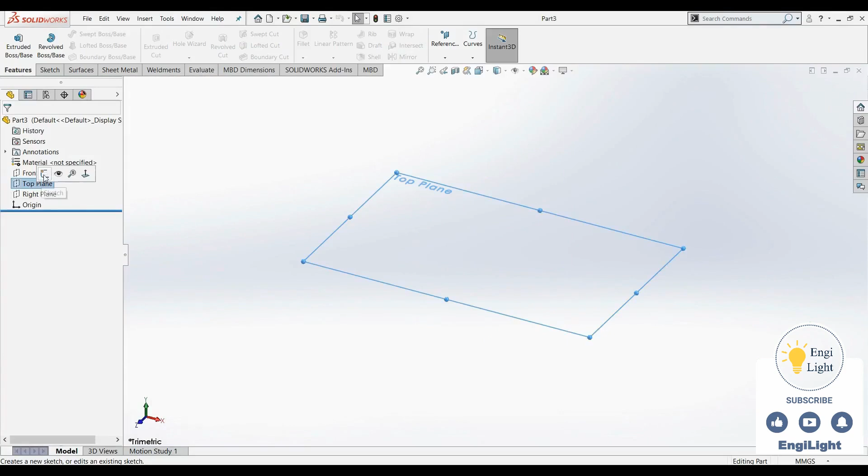So I enter the part module. On the top plane, I draw a circle with a diameter of 20 millimeters. And using the first rectangle type, corner rectangle, I draw a rectangle measuring 40 millimeters by 70 millimeters.

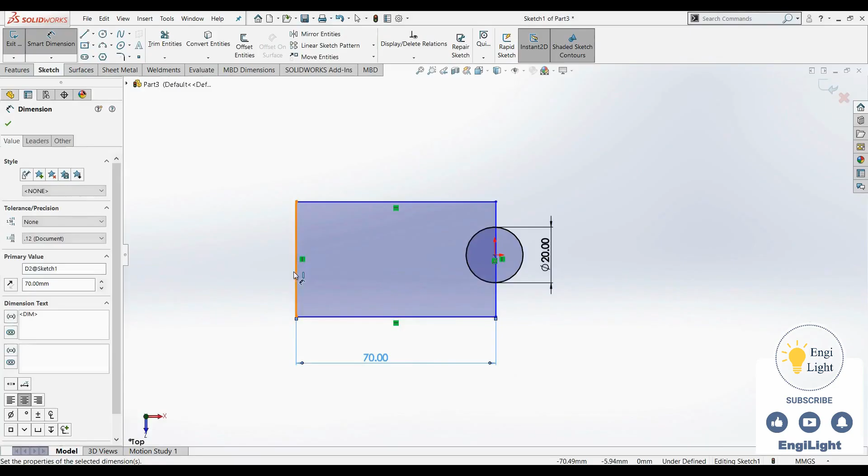This circle is located at a distance of 50 millimeters. And I place the center point of this line segment horizontally with my origin. Okay, I extrude the sketch by 20 millimeters.

Without exiting the sketch right here, I go to the Features tab and select the Extruded Boss command. SolidWorks automatically detects which areas to extrude. So in this section, I extrude my shape by 20 millimeters using the blind condition.

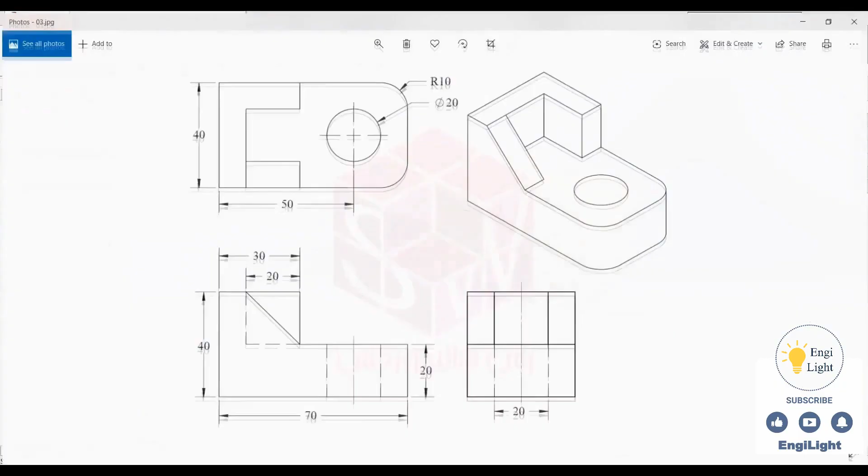Now, to draw this part of the shape, I look from the top again and draw the sketch on this face to create the shape I see from above. A size of 30 millimeters and a thickness of 10 millimeters. I enter a sketch on this face, go normal to the face, and draw the sketch using the line command.

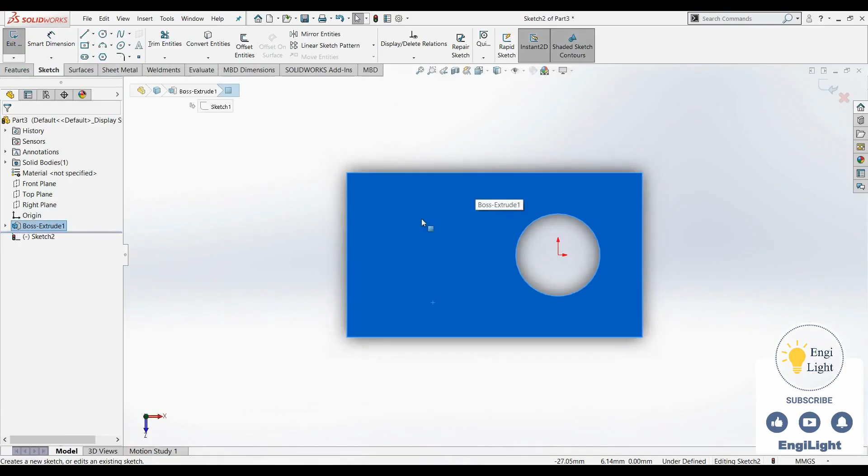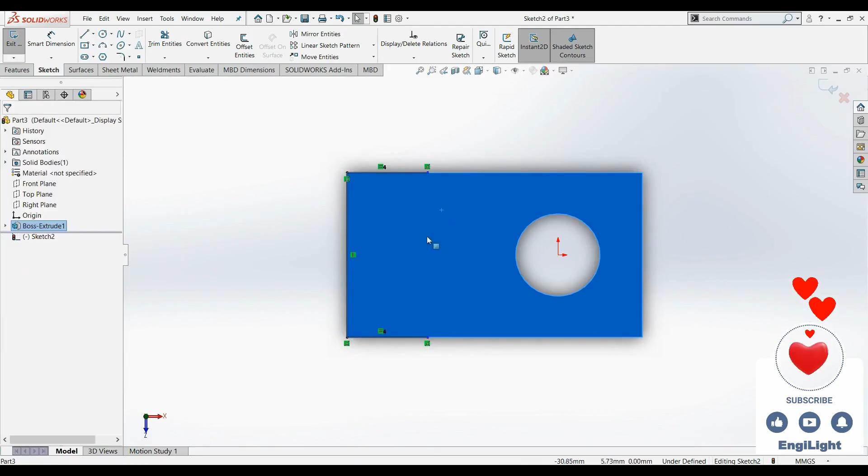I make these two equal to each other and apply a size of 30 millimeters. I set an offset distance of 10 millimeters for this section.

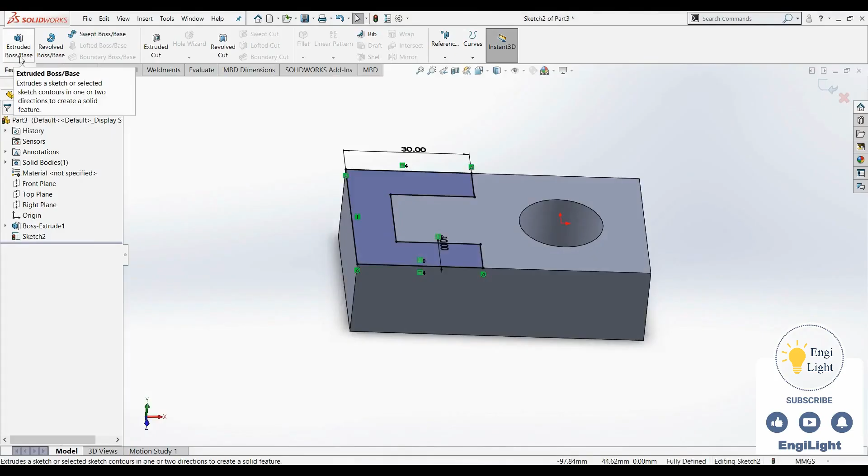I extrude the sketch I just drew on this face by 20 millimeters. So again, without exiting the sketch, I enter the Features tab and use the Extruded Boss command to add volume to the sketch by 20 millimeters.

Next, according to the reference drawing, to create this slope, I'll draw a sketch on this face, a triangular sketch. Then I'll use an extruded cut to remove material by 10 millimeters. So I enter a sketch on this face and draw a triangular sketch.

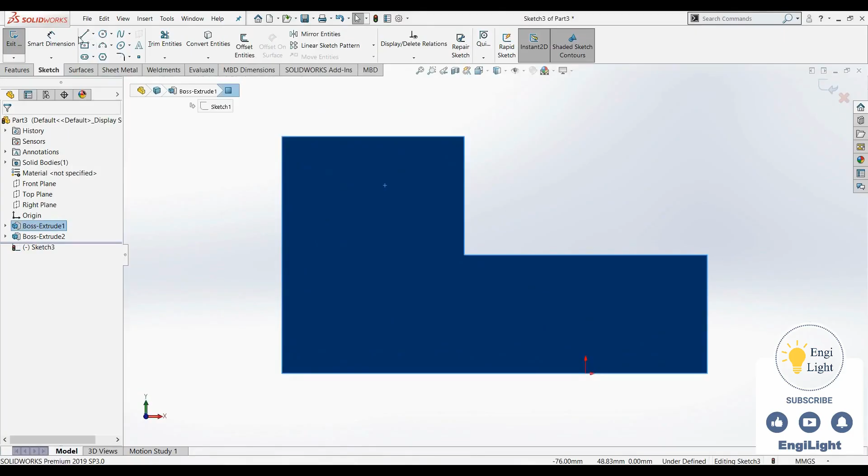From this area to this point, then this point, and up to this point, measuring 20 millimeters. Well, a dimension isn't needed here because these points have become coincident. We'll discuss this in more detail later. 20 millimeters, and another 20 millimeters.

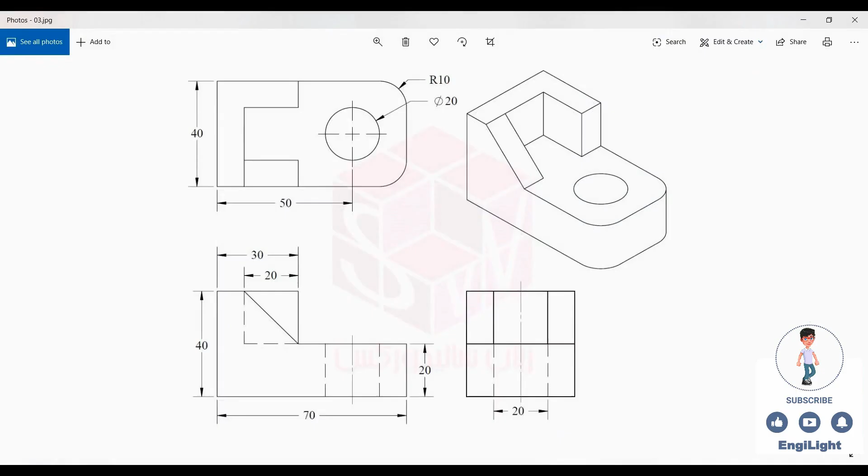And using the Extruded Cut command, I remove material from the shape by 10 millimeters based on the sketch drawn here.

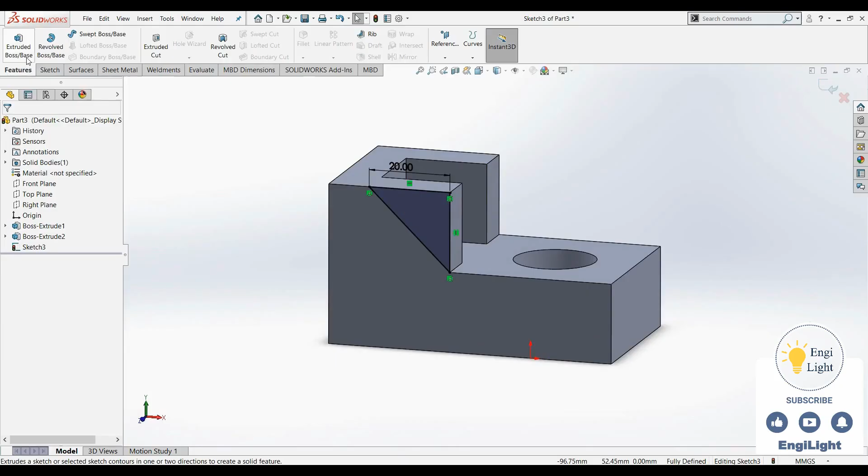Then, according to the reference drawing and the radius of 10 fillet, I apply a fillet to these corners. So from the Features tab, Fillet command, I define a fillet with a radius of 10 millimeters for this edge and this edge.

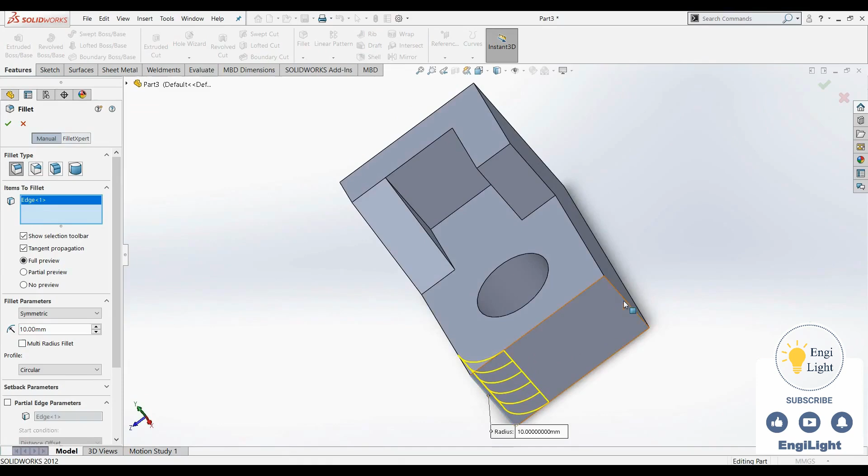This is how we design the shape. When we design a part in SolidWorks, very often the next stage is editing that part. In most cases, editing a part is actually more difficult than designing it from scratch. The more principled and careful we are during the initial design, the easier and less painful the editing process becomes later.

Let's examine an editing example within this part. Let's assume that after designing this part, we need to change the thickness of this part from 10 millimeters to 12 millimeters. What should we do?

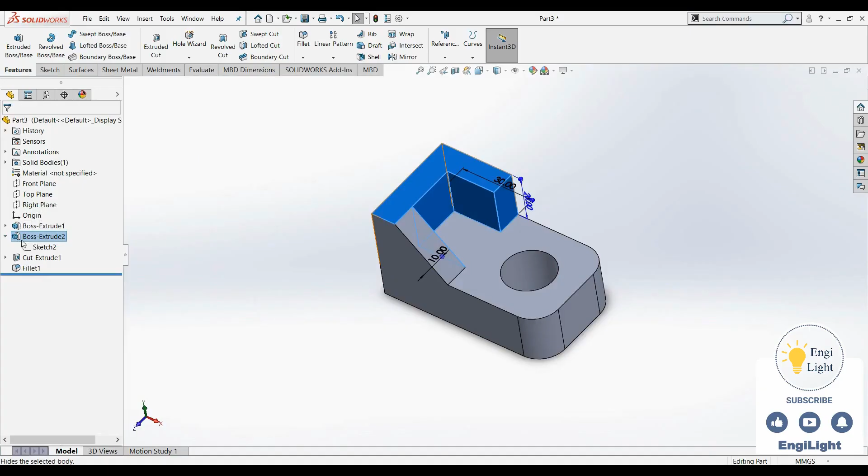We must go and find the feature that created this section, which is this feature. Since we want to edit the sketch, we can right-click on it and choose Edit Sketch, or from the pop-up here, select Edit Sketch. Or find the sketch in the Feature Manager tree and right-click to select Edit Sketch.

We enter Sketch Editing Mode, go Normal To, and change this value from 10 mm to 12 mm. As soon as I exit the sketch, the changes are applied.

However, this extruded cut, since I set it to cut 10 mm, is now causing a problem. Imagine if you were working on a complex part—small details like this could really cause issues.

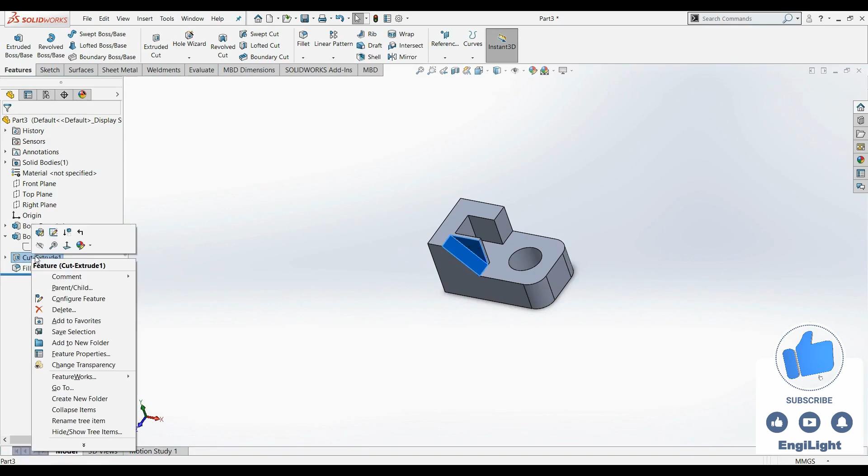To fix this problem, I find the feature where I made this cut, which is this extruded cut right here. I edit the feature, and this time, instead of cutting 10 mm, I set the direction one end condition to up to vertex. And in this box, I can specify that the cut goes up to a desired point, for example, up to this point here.

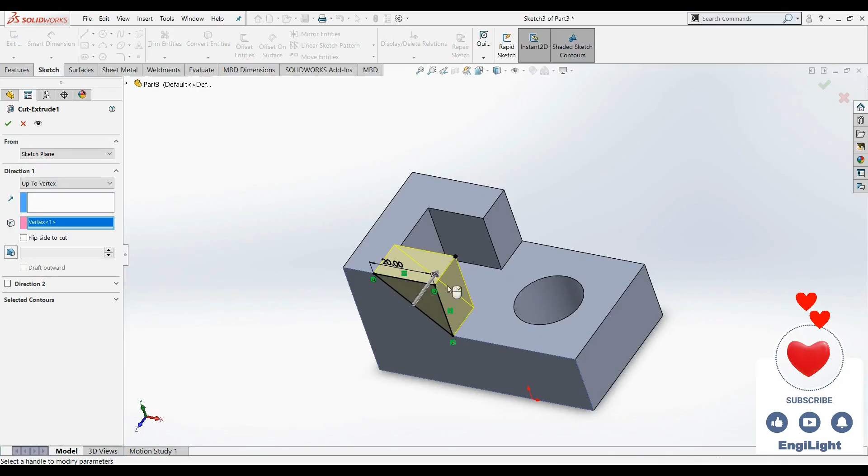Now, if I click OK and edit the sketch again, this time, no matter how much I change the thickness, for example, if I change it to 14 mm, it still cuts up to the corner point.

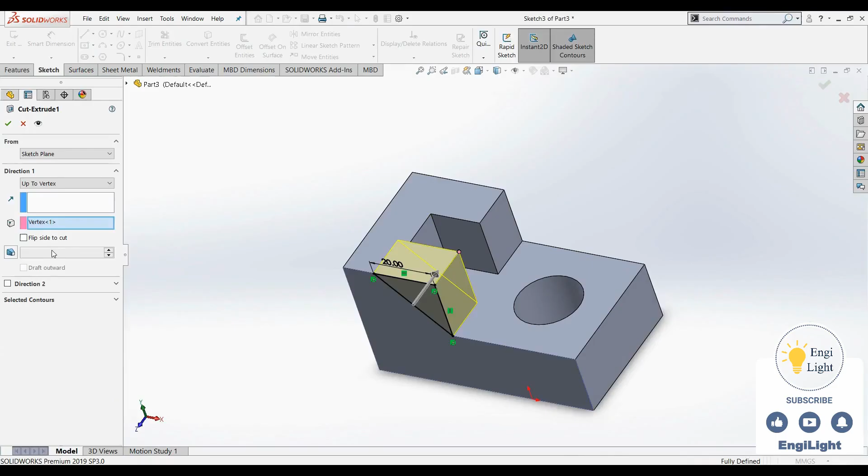Let's go back to the extruded cut feature and edit it again. So we select up to vertex here, and in this section, we define the point up to which the sketch will be cut.

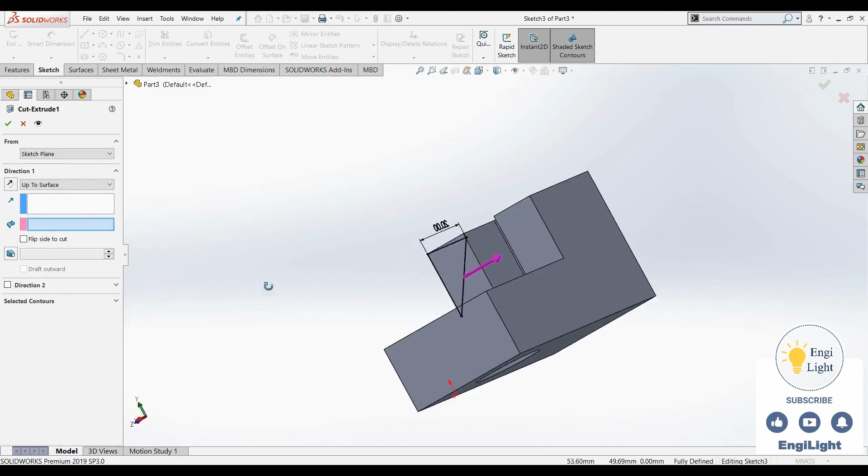From this same section, this time I select up to surface. A surface means a face of the model, either flat or curved, or even a reference plane, and I can specify it here—for example, cut up to this surface or this one, which gives the same result.

If I click OK, no matter how much I change the thickness, for example, even if I change it to 5 mm, it will still cut the shape up to the surface I specified.

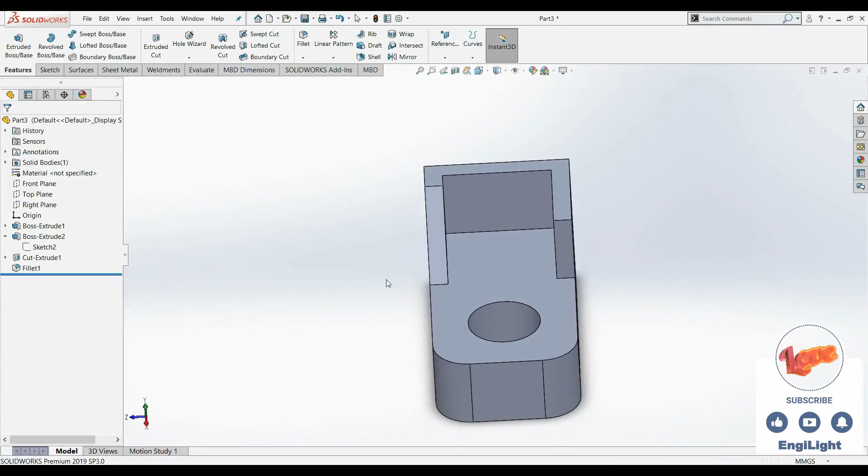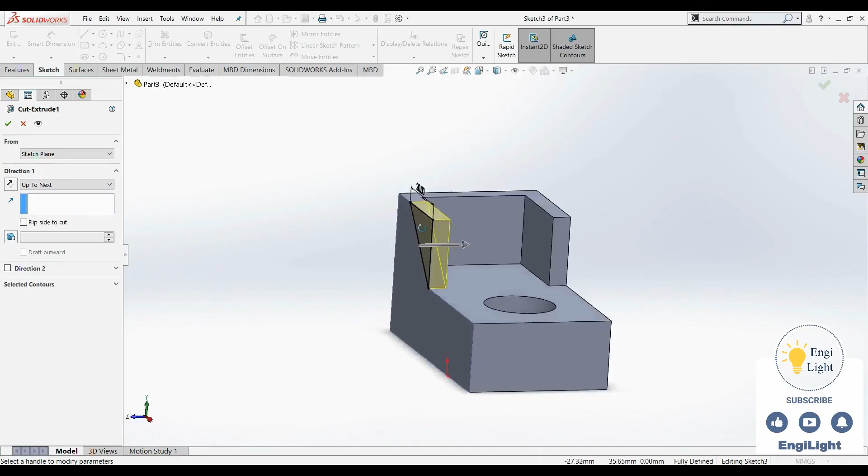Again, in this same section, we've covered up to vertex, up to surface, and up to next. Up to next cuts the model up to the first face or boundary it encounters in the direction of the cut. In this case, the cut stops at this face, because if the sketch continues, it would end here.

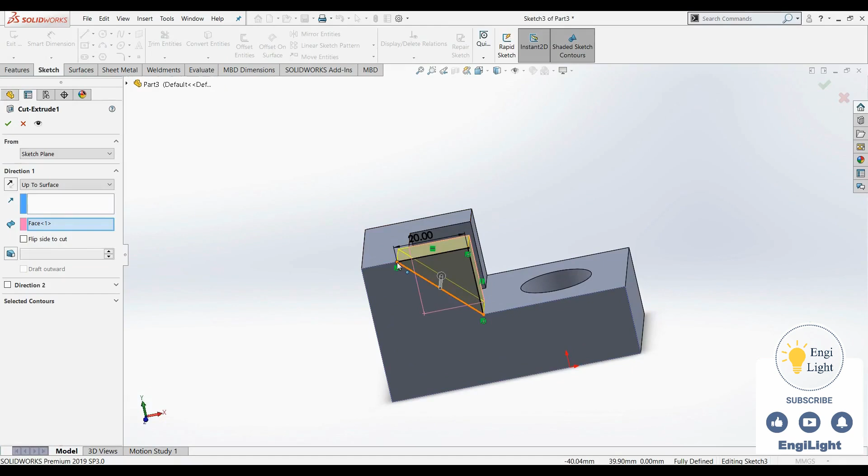However, if I change the thickness to 13 mm, and go back to the extruded cut, since the sketch now extends to this point, the next condition is defined by this face. It starts from this face and cuts up to this one. So if I select up to next, it cuts up to here this time.

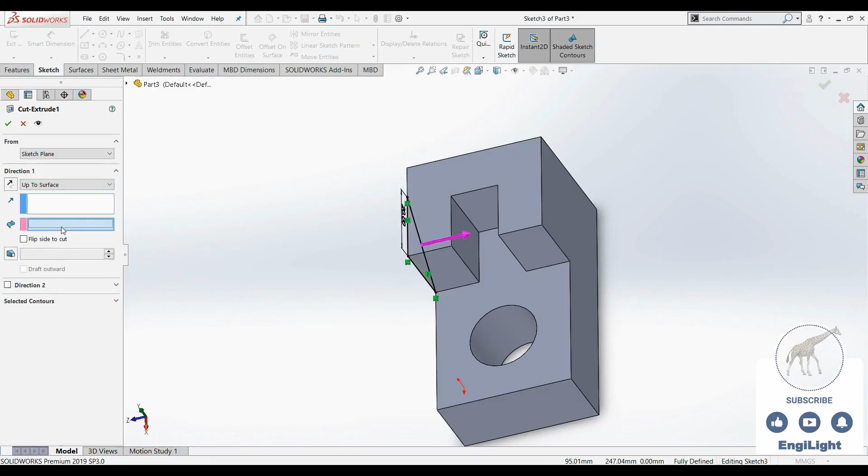So now we're familiar with up to next, up to vertex, and up to surface. For this example, I select up to surface and choose this face as the limit for the cut. Okay, I set the dimension back to 10 mm.

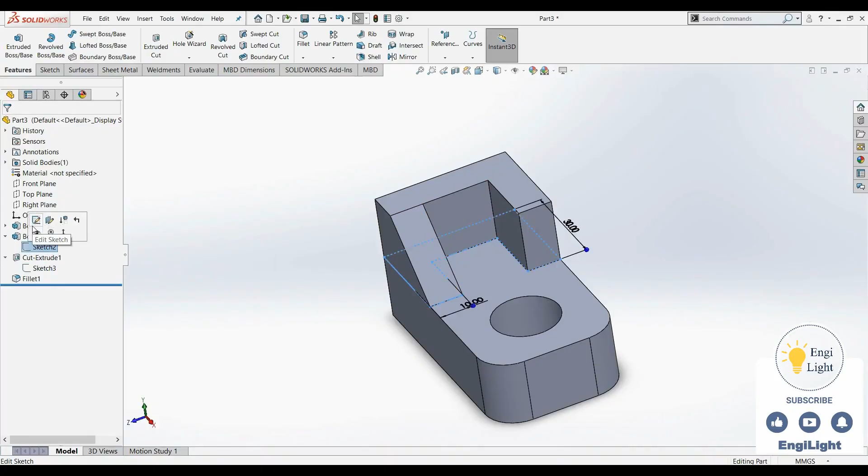This time, we'll look at another key point together. I want this sketch, or the slope created by it, to always start from this face. Here, if I change the thickness to 12 mm, we can see that the slope now starts forming from this inner edge within the thickness.

The reason is that when we drew this sketch, we set this dimension to be 20 mm. When this dimension changes, while the 20 mm value stays the same, the slope naturally starts forming further inward. First, we need to remove this 20 mm dimension.

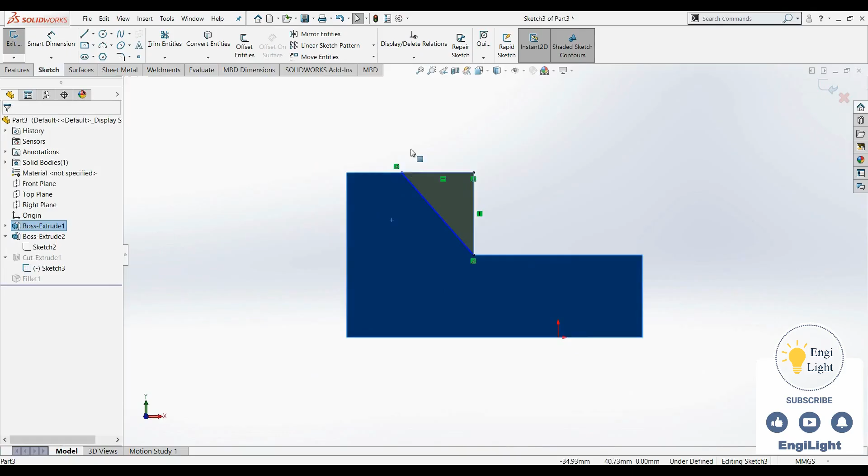Then, while creating the sketch, we can try selecting this point and this edge to apply a pierce relation. However, since the edge doesn't extend to that point and no intersection is detected, the relation won't be applied.

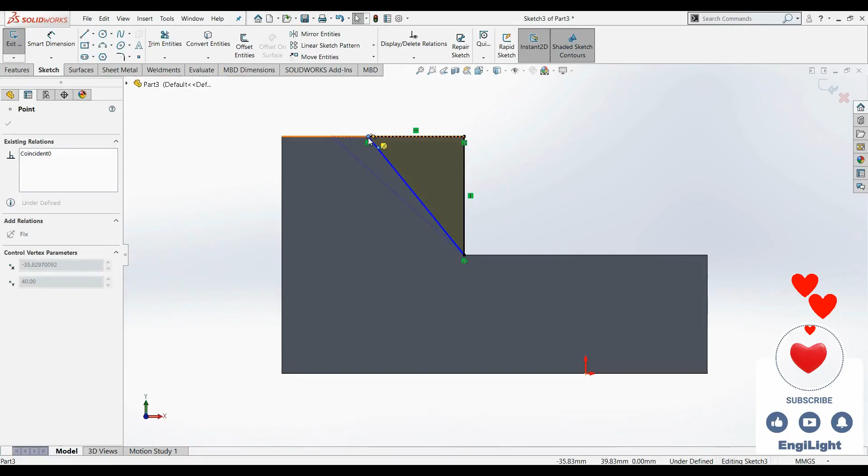In this case, it's better to select this face and the point, and then apply a coincident relation. No matter how this face changes, this point will update along with it. Again, in the same way, this coincident relation is applied to this line, and also to this line.

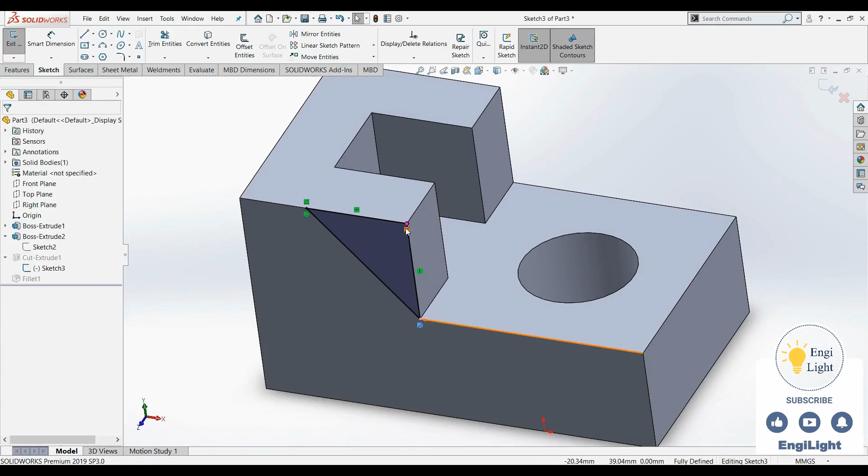For this reason, even without adding any dimensions, the sketch is fully defined, because all the triangle's points are constrained to different entities.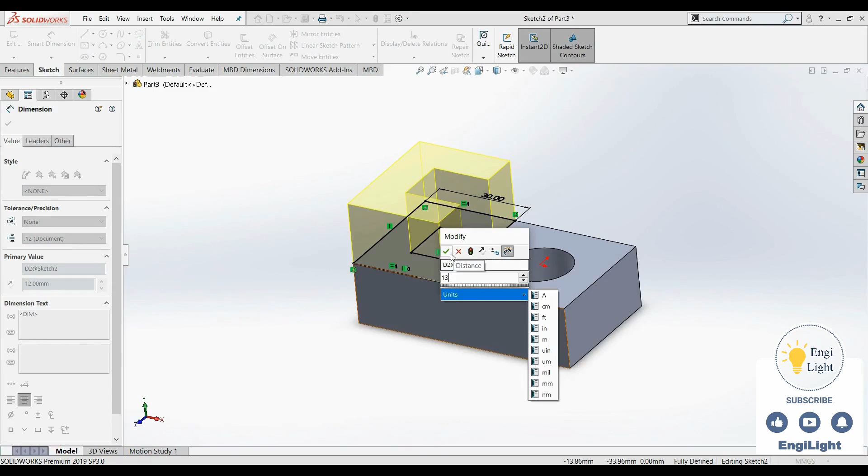So, if I make this point coincident with this face, no matter how I change the dimension right now, for example, to 13 millimeters, the shape will remain exactly as intended.

So, you need to pay close attention to these small details when choosing your sketch, feature types, and conditions to avoid problems during later edits.